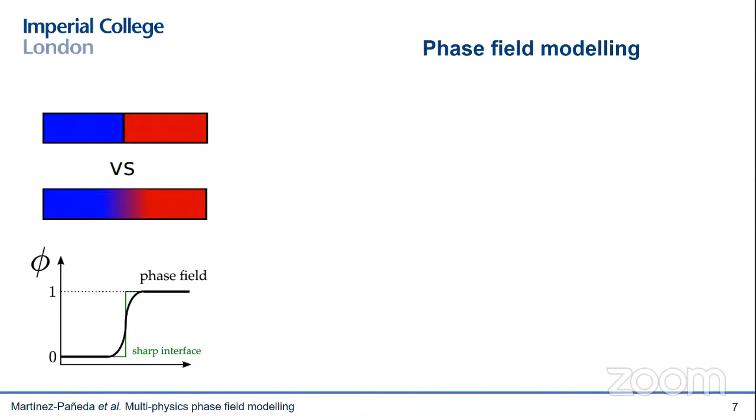So this could be cracks propagating, this could be grain boundaries evolving - whatever interfacial problem that you have, this very simple computational idea is quite powerful, and it allows you to track interfaces easily. There's three key advantages that I always like to emphasize.

The first one is that the interface equation is defined in the entire domain, so there's no need for any special treatment. The second one is that topological changes such as merging or divisions of interfaces can be naturally captured without any ad hoc criteria. And the final one is that it's very well suited for multi-physics problems, because you can easily couple that interface equation with equations describing other physical phenomena.

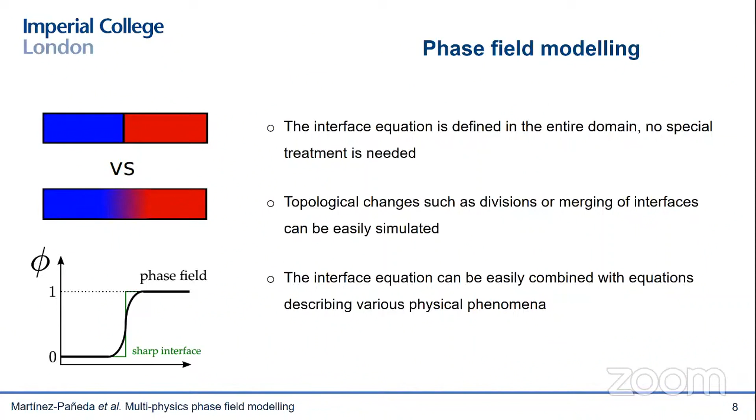So this is something that we're going to use quite significantly. In fact, phase field modeling has revolutionized many areas of science and engineering. Everything started in the condensed matter physics community and is now by far the most popular tool to simulate microstructural evolution and solidification. It has also very quickly become popular in the fracture mechanics community - I think I read that roughly a third of fracture mechanics papers these days are using this methodology.

And we have also very recently shown that it could also be used to describe the evolution of the corrosion front. These are all simulations, by the way. You can see very complex interfacial phenomena can be captured. If you look at the fracture problem, you can see that you get crack branching, coalescence of multiple cracks, initiations of cracks from secondary sites.

Or here you can see in corrosion how you can predict material dissolution, the evolution of the corrosion front, across secondary particles, and so on and so forth. So it could potentially be a very compelling tool, and I was going to use this for many of the problems that I'll be discussing later on.

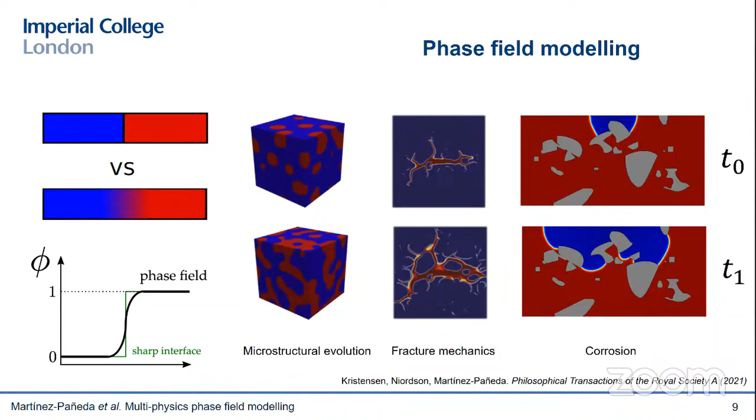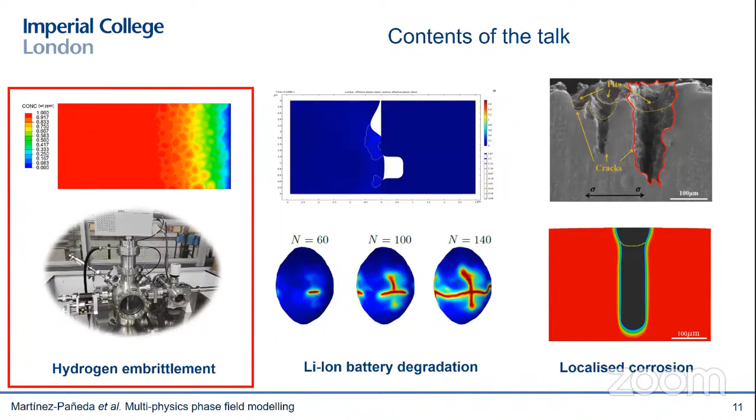So let me go back to the content of my talk. Just to motivate this, I think a big part of the motivation to work on hydrogen these days comes from the energy transition. We know that hydrogen is typically called the Swiss knife for decarbonization, and we know that it's going to play a key role in this energy transition. This is because hydrogen has the potential to decarbonize many applications and sectors, including some that are going to be particularly difficult to decarbonize, such as steel making or aviation.

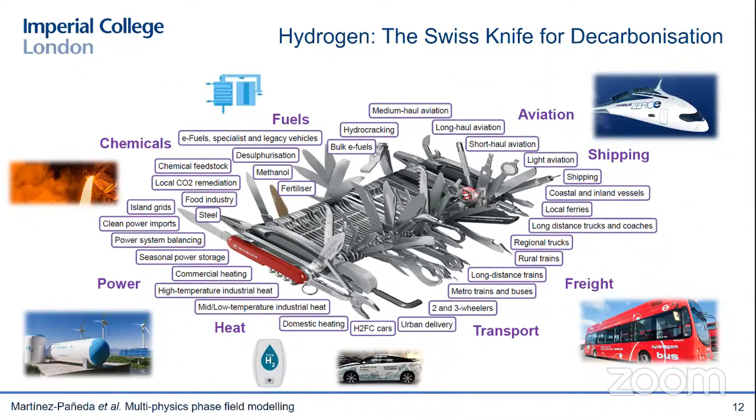But the problem with hydrogen is that it has a dark side. We know since almost 150 years ago that hydrogen makes metals very brittle. You can see here, this was a paper by Johnson in the Proceedings of the Royal Society back in 1875, where he speaks about some remarkable and extraordinary decrease in toughness and breaking strain in iron and steel in the presence of hydrogen.

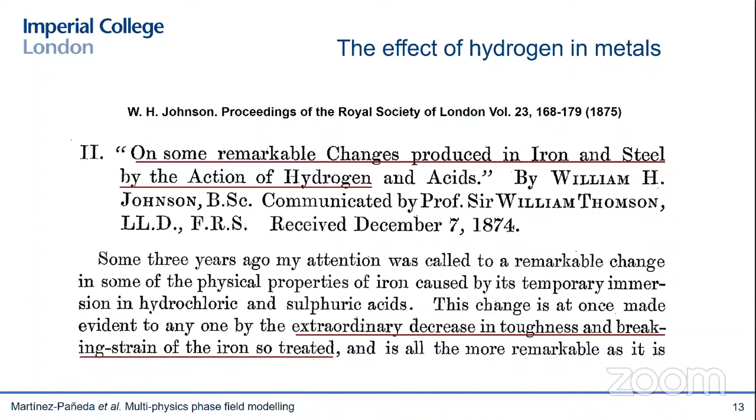In those days, it was very rare to see words such as remarkable or extraordinary in scientific papers. But the way hydrogen interacts with metals is indeed remarkable and extraordinary.

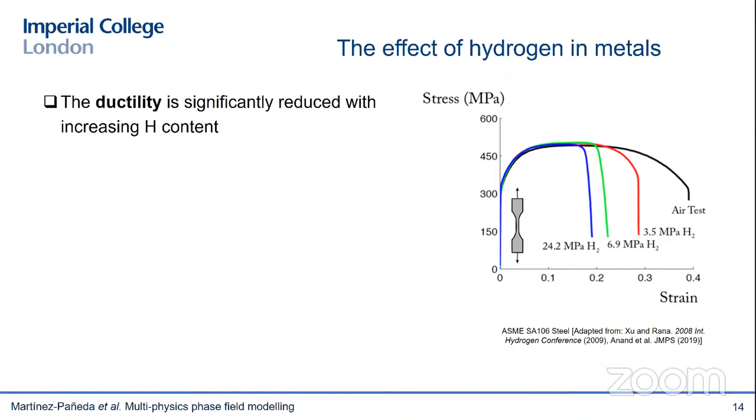One of the things we observed is a very significant reduction in ductility with increasing hydrogen content. You can see this here in these uniaxial stress strain curves. If I introduce hydrogen into my samples, I get a very significant reduction in the failure strain.

Another thing we observed is a reduction in fracture toughness. You can see here that we go from a fracture toughness of 150 megapascal square root meter to well below 40 megapascal square root meter if I introduce hydrogen into my samples, for example, by exposing them to hydrogen gas.

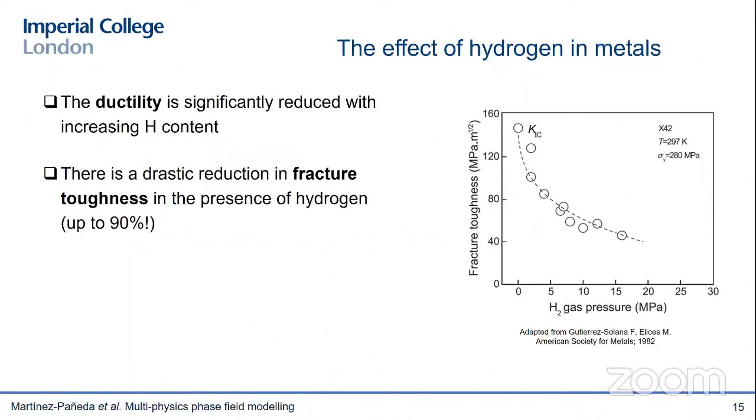All the results I've shown so far are for mid-strength steels. But in high-strength steels, this susceptibility to hydrogen damage increases dramatically. You can get fracture resistance reductions of orders of magnitude in these high-strength steels.

This is a key point to emphasize: the susceptibility to hydrogen damage increases with the material strength. You can see here fracture toughness versus yield strength, and these very high strength steels have a fracture toughness in the presence of hydrogen that is below 10 megapascals root meter, so almost as brittle as a ceramic.

This is quite important because it's basically telling us two things. First, hydrogen is compromising decades of metallurgical research. We have developed high performance materials, but we cannot use them. Second, by using these modern high-strength steels, we're very significantly widening the range of environments where hydrogen is problematic. Very little hydrogen content is sufficient to trigger hydrogen embrittlement failures in many applications and sectors where we never heard about this problem before.

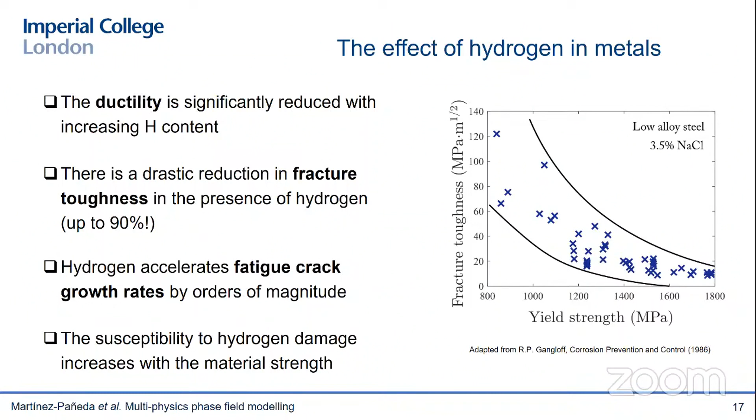Hydrogen embrittlement has traditionally been a problem related to offshore structures, where we have very aggressive environments. But now we want to use these modern high-strength steels because they're very cost-effective. So we want to use them in our cars, in our buildings, in our bridges, in our railways. And this is triggering numerous hydrogen-assisted failure problems.

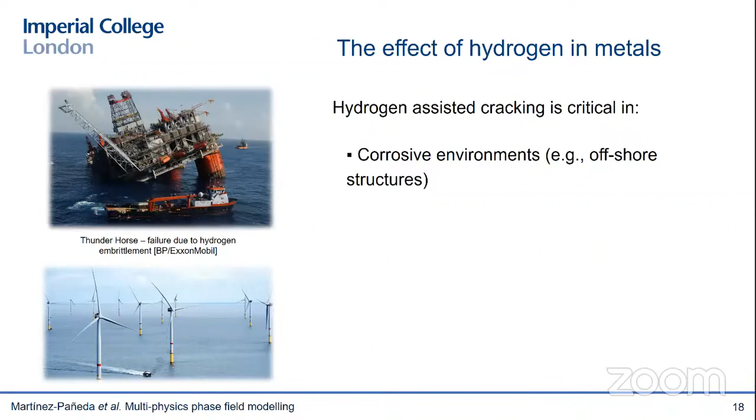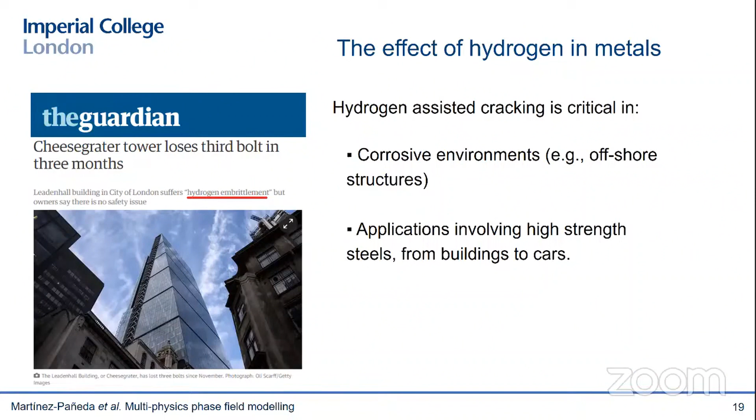You can see here, in otherwise very benign environments - this is a newspaper article from The Guardian, one of the main newspapers in the UK. You can see that just the hydrogen coming from the humidity is enough to trigger hydrogen embrittlement problems in one of the most famous skyscrapers in London.

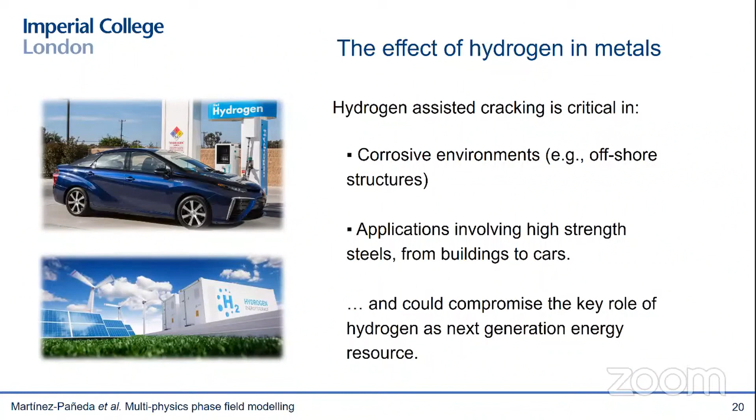And of course, this brings me back to my first motivation. If hydrogen can change by orders of magnitude the fracture toughness and crack growth rates in metals, how are we going to deploy this hydrogen energy infrastructure that we need to achieve net zero?

Well, I guess the thing is that there's no way back. Politicians have already made a decision. I don't know if it's the case in Brazil, but in Europe, there's a big push now to establish green hydrogen as an alternative source of energy. You can see some newspaper articles here. So there's a lot of money going in that direction.

And again, an impression that things need to happen very fast. There's a sense of urgency. You can see here, National Grid in the UK is hoping to have 4,700 miles of hydrogen transport pipelines in just 2 years. And that's going to be very challenging.

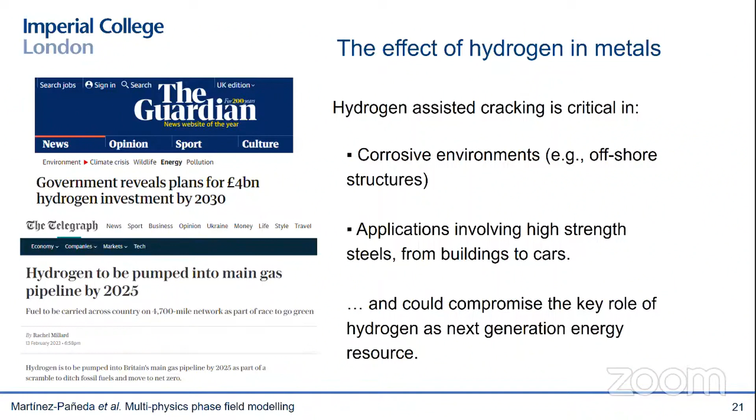In fact, we're already starting to see accidents, and the technology is not even there yet. This is in Norway. Very few countries have already started to establish the hydrogen technology, and we're already starting to see accidents there. And of course, what is missing here is a model.

It would be fantastic to have a model that would allow us to predict these hydrogen-assisted failures, because such a model will be a game changer. It will allow us to map safe regimes of operation. It will allow us to safely deploy a hydrogen energy infrastructure, and it will allow us to prevent those catastrophic failures.

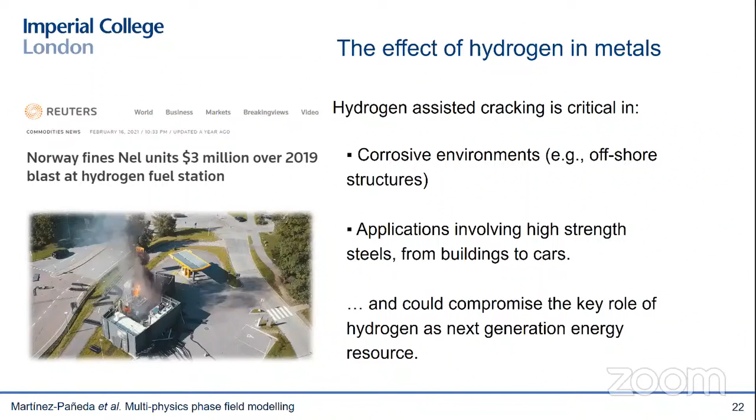But developing a model for hydrogen-assisted cracking is quite a long-standing scientific challenge. I think there are two main reasons why we don't have a model for predicting these hydrogen failures. One is that the problem is quite complicated and it crosses multiple boundaries. So we do know a little bit of the physics, but not the whole picture. We know that hydrogen atoms coming from gas, electrolyte, or water vapor environments will enter the metal.

They will migrate relatively fast through the crystal lattice, and they will accumulate in areas of high hydrostatic stress or high volumetric strains, where there's more space for the hydrogen to accumulate. But then hydrogen in this fracture process zone interacts with the metal at multiple scales and in many ways, by changing the dislocation mobility, the bonding strength. So the physical picture is not clear yet.

The second aspect to consider is that developing a model for predicting hydrogen-assisted failures will require expertise across multiple disciplines: chemistry, condensed matter physics, mechanics, material science. So it's quite a complicated problem. So I tried to adopt a multidisciplinary approach and develop a computational framework that would allow me to predict these hydrogen-assisted failures.

And to me, the key to prediction is that you need to be mechanistic. You need to be able to resolve the physical processes that are governing all the stages involved in hydrogen embrittlement, from the uptake of hydrogen, the ingress of hydrogen into the metal, to the transport of hydrogen through the crystal lattice, to the embrittlement process itself. So the accumulation of hydrogen in critical interfaces and the nucleation and growth of cracks as a result of that.

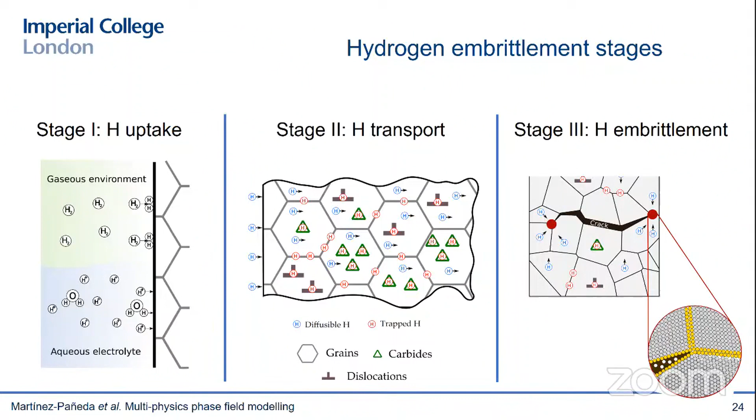So let me tell you a little bit of how I came up with this model. I think you probably get a clue at this stage that this is quite a beautiful problem because it is fundamentally very challenging. Many things are happening in there. It's very multidisciplinary, and at the same time, as I motivated before, it has very strong implications for engineering practice. So it's a very rewarding problem to work on as a scientist and engineer.

So let me explain to you what we did. The first thing is dealing with the hydrogen uptake. There we had to propose new models that were able to capture and quantify the absorption of hydrogen into the metal as a function of the environment.

There's two typical scenarios: gaseous systems and aqueous electrolyte systems. The gaseous systems are easier, and under certain conditions, you can find an expression that relates the hydrogen pressure or fugacity to the hydrogen concentration at the metal surface.

The aqueous electrolyte system is much more complicated because you need to resolve all the surface reactions happening at the surface of the metal, and you also need to solve the electrochemistry of the electrolyte, which can be very different inside of a pit or a crack relative to the bulk.

But we do know the physics, the equations that govern the hydrogen evolution reaction and the electrochemistry of electrolytes, so we can formulate a theory, and then we can implement that theory into a finite element code.

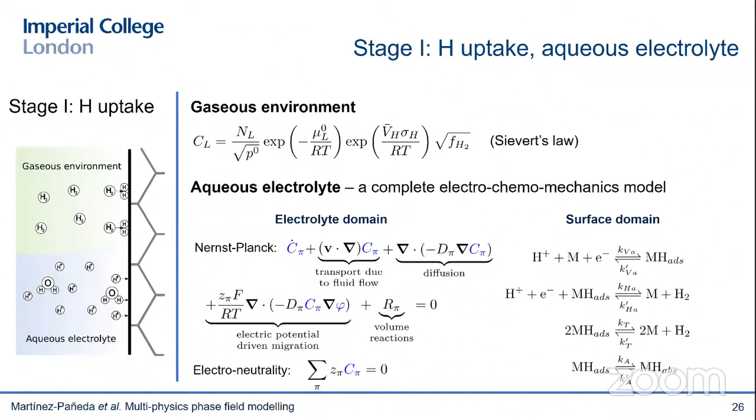So this means that the kind of theory we can come up with involves solving the Nernst-Planck equations for as many ionic species as needed in the electrolyte domain, and then solving the Volmer-Heyrovsky-Tafel and absorption reactions at the surface of the metal. These are the surface reactions. I'm not going to get into details, but the key point is that the model is physically based, in that it doesn't require any prior assumptions.

On the environment. You just rely on reaction rates that depend on the material and that you can measure in the lab. You can see that the pH and the overpotential come into play here. So the model is fully predictive in that sense.

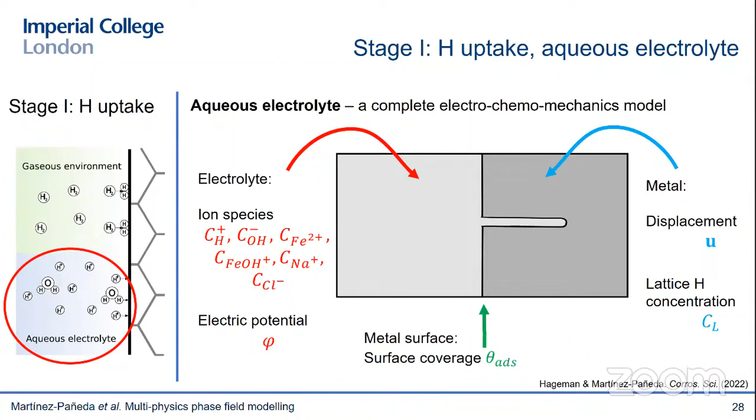At the end, you end up solving for all of these degrees of freedom in your finite element model: as many ionic species as needed in the electrolyte, the surface coverage at the interface, and then in the metal domain, the displacement and the lattice hydrogen concentration, among other things. So you end up easily with, I don't know, 10, 15 degrees of freedom per node. Of course, solving this 10 years ago was unthinkable, but computers have come a long way since then, and we have also developed in my group new computational procedures that can significantly accelerate these calculations.

Once you know how much hydrogen is coming into the metal, you can predict the transport of hydrogen within the metal itself, to predict the distribution of hydrogen within your structural component. One simple way of doing that is using an extended version of Fick's law, whereby hydrogen is driven by gradients of concentration and also gradients of hydrostatic stress. This coupling with the mechanics is quite important, because if you take the steady state solution of this equation, you end up with a hydrostatic stress term inside an exponential. So whenever you have a stress concentrator like a crack, your concentration of hydrogen is going to be much, much higher. This is a key element you don't want to miss in your model.

Another important aspect is that hydrogen not only travels freely through the crystal lattice, it's also trapped at microstructural features like grain boundaries, carbides, or dislocations. Those microstructural defects will sequester the hydrogen away from the crystal lattice. So we have developed more sophisticated models based on Oriani or McNabb-Foster, where we can account for this distribution of hydrogen within the microstructure, and predict where exactly the hydrogen lies.

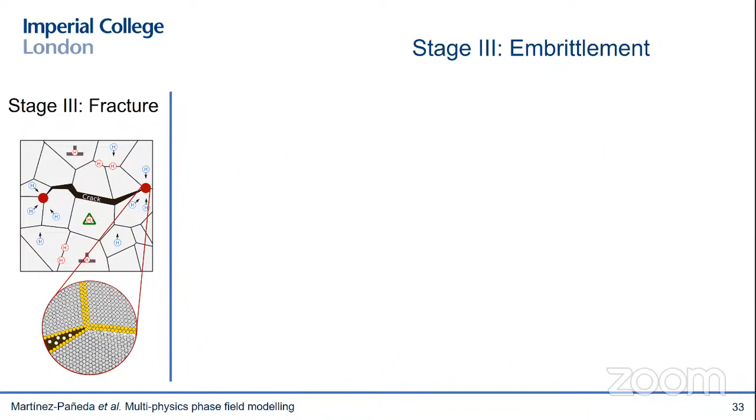The good thing is that phase field, in the context of fracture mechanics, provides a computational platform for Griffith's energy balance. Those of you who have studied fracture mechanics will remember that Griffith, the father of the field, postulated that a crack will grow whenever the energy stored in the solid was sufficiently large to overcome the energy required to create new surfaces.

So you express this balance of energy in a variational form. If you're able to minimize this functional, you can predict the evolution of cracks just as an interplay between the fracture energy and the stored energy in the solid. However, the challenge is that you don't really know where your crack surface lies, so it's a bit complicated to solve this computation.

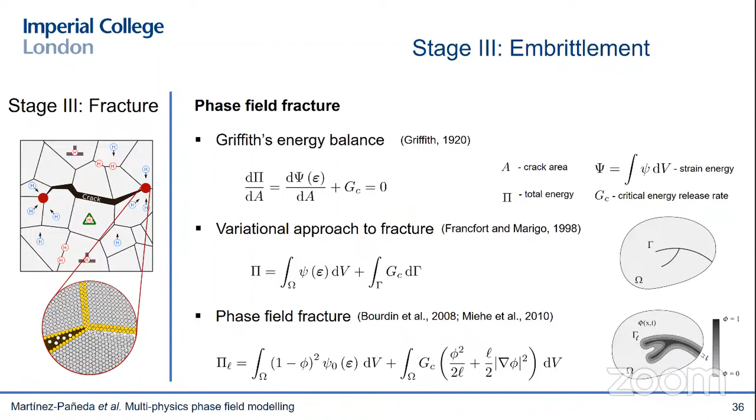You can get a good overview by looking here at the balance of the strain energy density and the fracture energy, the material property that measures the resistance of the material to fracture. Just by solving this additional differential equation, you can capture very complicated cracking phenomena on the original finite element mesh, without any convergence problems.

So all the results are based on Bourdin et al..

We've had a lot of fun in the past five years working in this area. We've tried to contribute to the community, proposing new monolithic solution schemes, new formulations for functionally graded materials, shape memory alloys, and other materials. But of course, we haven't been the only ones working here. This has been really a revolution in fracture mechanics, and some people in this room, like Fernando, have actually contributed to this area much before I did, with new formulations for fracture in elastoplastic solids, and also for

dilute species. So basically, I thought if I can extend the success of phase field to hydrogen embrittlement, that would allow me to capture this completely coupled field problem, where you solve the deformation, then the transport of hydrogen, and the key coupling between these is the coupling between the hydrogen and the damage.

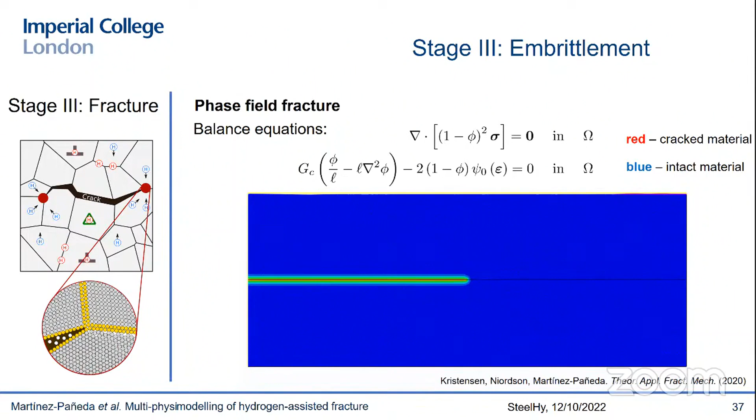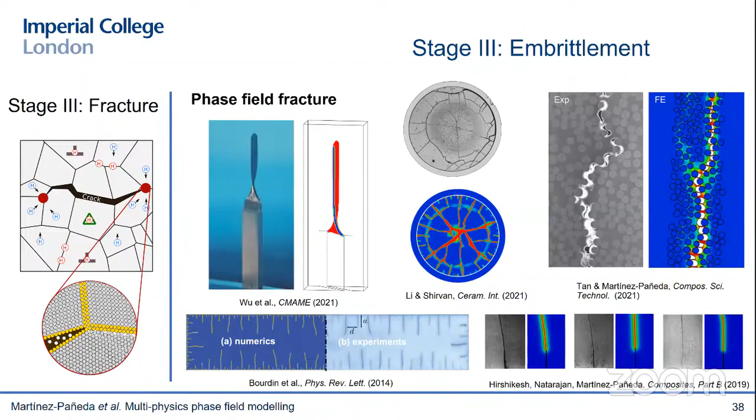The good news is that you can define this degradation function based on experiments. You can do experiments in multiple hydrogen concentrations and measure fracture toughness, and some of our industrial partners are doing that. Or you can also come up with any mechanistic degradation law that you're thinking of. In fact, some other groups have taken on our framework and extended it in other directions, making this degradation function depend on other micromechanical or macromechanical factors.

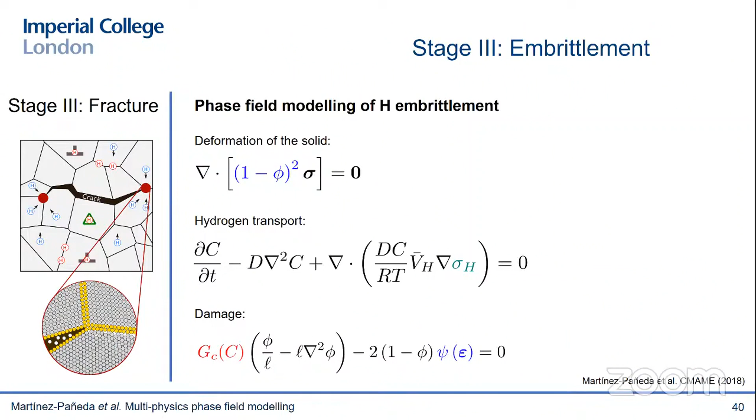But let me tell you a little bit of how I came up with what I think is the right hydrogen degradation function. The key question you need to answer is: how does hydrogen make metals brittle? How can it be that in the absence of hydrogen, a metal fails in a very ductile manner, through micro-void coalescence mechanisms, but the moment you bring hydrogen into the picture, it fails in a very brittle fashion, with cracks originating along the grain boundaries, as you can see there?

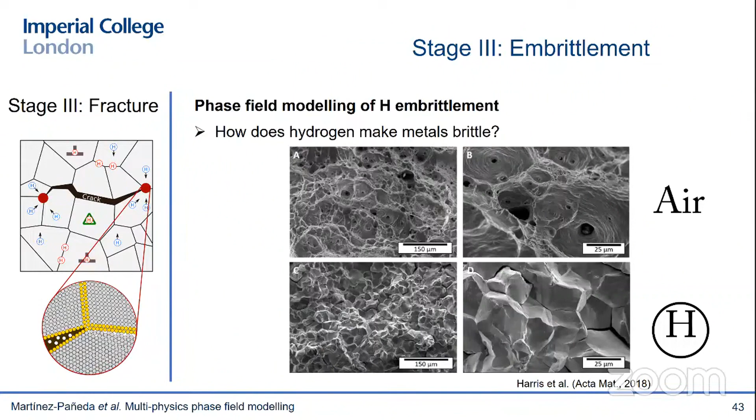We can use Oriani's equilibrium and we can measure binding energies in our lab. There we can plot the trap occupancy as a function of the hydrogen concentration in the lattice and the trap binding energy, a parameter we can measure in the lab. We know from our lab experiments that grain boundaries are quite strong traps, with a binding energy of minus 40 kilojoules per mole.

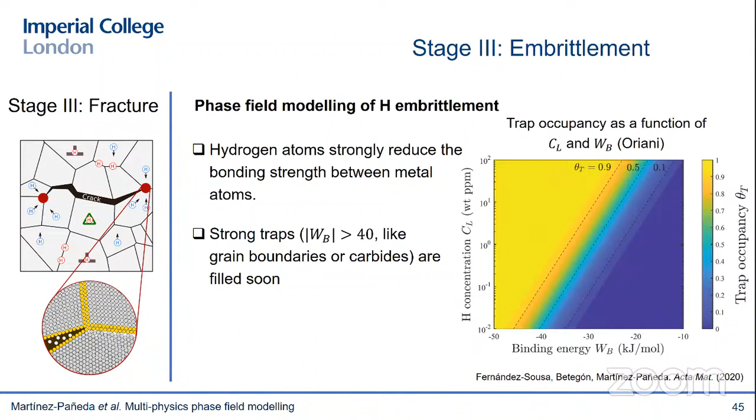So if I go here, I can see that my trap is effectively full if I have as little as 1 part per million of hydrogen. In other words, it is very energetically favorable for the hydrogen to accumulate in grain boundaries, and I know from the atomistics that this is going to make my grain boundaries much weaker. Then the next question is: is a 30 to 40% reduction in fracture energy or grain boundary strength sufficient to trigger a shift in failure mode from ductile to brittle?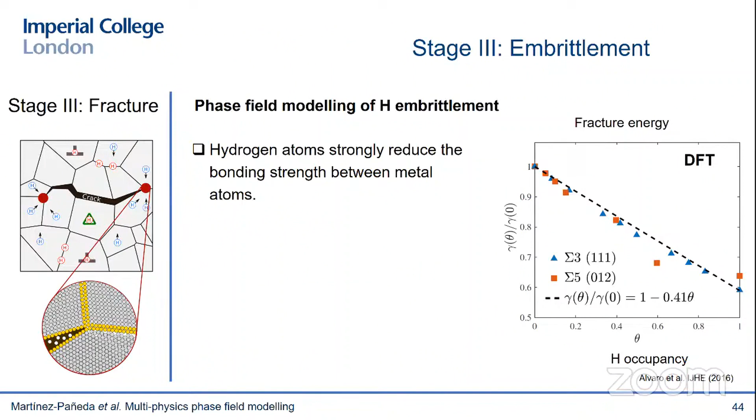In my opinion, the answer comes if you resolve the critical stresses of the problem over the critical distance. For that, I won't get into details, but we use strain gradient plasticity theories, because we know from experiments that the critical distance is a few microns ahead of the crack tip. So you need to resolve the dislocation hardening mechanisms that govern crack tip behavior.

But the key thing is that if you resolve the stresses ahead of the crack tip over the critical distance, you see that in the absence of hydrogen, your stresses are not high enough to reach that cleavage strength or grain boundary strength. But the moment you bring hydrogen into the picture, you get this 30 to 40% reduction in cleavage strength or grain boundary strength.

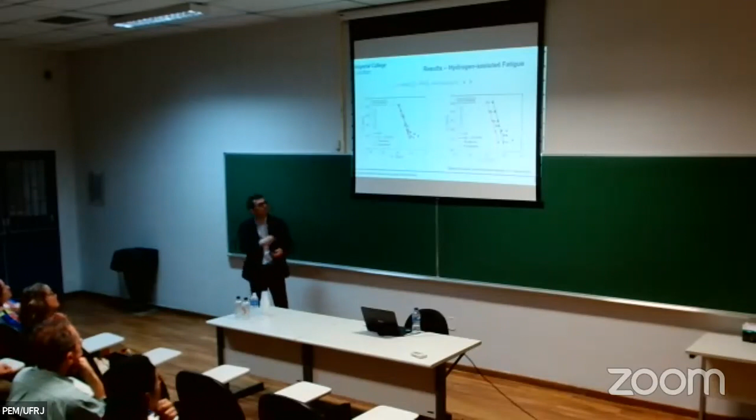And we can also predict as an output of the model Paris law behavior, so we can predict the influence of hydrogen on the Paris law coefficients, and deliver virtual SN curves for any arbitrary choice of example, as you see here, and environment, as you see here, for any given sample.

And these are cycle by cycle calculations, which are computationally heavy, but at the same time very powerful because they allow us to predict fatigue damage for any arbitrary load.

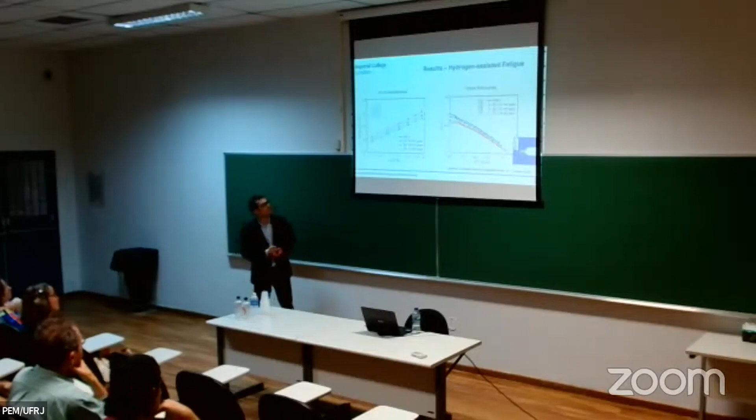Okay, so that takes me to the second part of my talk, lithium-ion battery degradation. The first one was the longest one, so don't worry too much. Regarding batteries, this one needs no motivation, I think. All of you probably now have with yourselves a device like a phone or a laptop that contains a lithium-ion battery.

So I guess the key question for us is that we want our batteries to last longer. We don't want to change them more than every 2 years. We want the battery of our laptop to last for transatlantic flights. We want our electric cars to be able to go over hundreds of miles and so on and so forth. So there's a need to improve the durability and the performance of lithium-ion batteries.

I suspect most of you know how lithium-ion batteries work. Essentially, every time you charge the battery, you have lithium ions that go from these particles in the cathode to these particles in the anode. And every time you discharge the battery, the lithium ions do the opposite, going from the anode particles to the cathode particles.

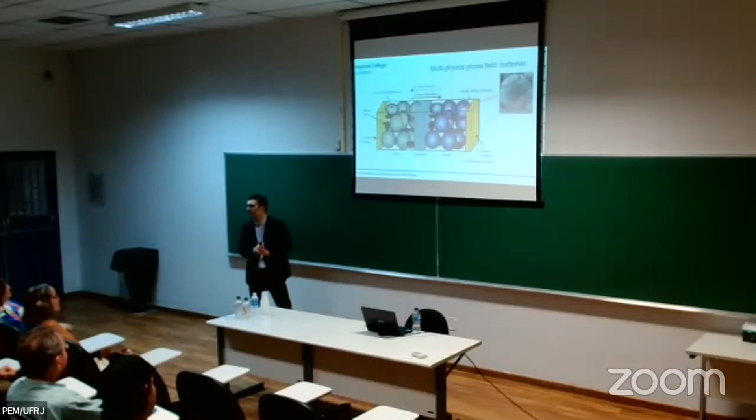That lithiation of those particles, that exchange of lithium ions inside the particles, causes some deformation within them. And that continuous cycling, the swelling and shrinking of those particles, causes the accumulation of cracks. This is arguably the main degradation mechanism for lithium-ion batteries. The reason why your phone needs to be charged every night is those cracks appearing in the electrode particles as a result of charge and discharge, this swelling and shrinking of the particles.

So we try to use those models that I presented before, these kind of multi-physics based fracture models, to predict under what conditions we will see those cracks, and to try to map safe regimes of operation of those lithium-ion batteries. You can see here.

The idea is quite simple and quite similar to the previous model. The equations are almost the same. You can see that we again have a three-field problem. In this case, we're modeling lithium diffusion instead of hydrogen. There are two main differences. The first is that the lithium diffusivity changes a lot, in fact. The second is that we have these chemical strains that also exist in hydrogen, but they are very small, so we normally neglect them. But these are particularly significant in lithium, because the partial molar volume is quite high.

And in fact, these chemical strains caused by the difference in concentration of lithium, the swelling and shrinking of the particles, is in fact what leads to the cracking process. We don't have any other mechanical load, it's just the lithiation process.

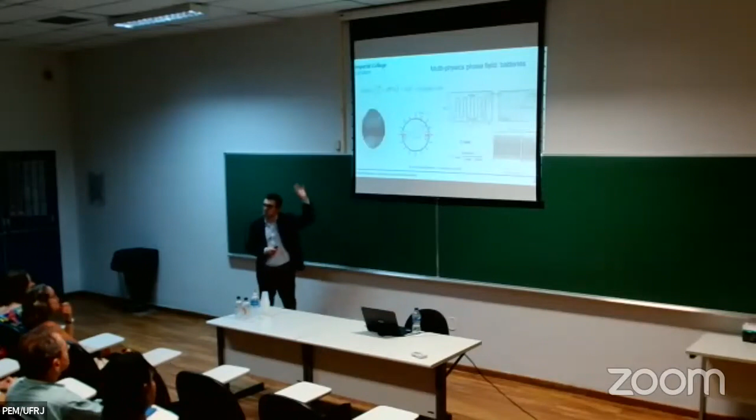Some people have used phase field models to simulate the failure of electrode particles, but they did that only over half a cycle. But of course, this is a cyclic process. So what we did is add this fatigue degradation function and simulate the failure of these particles over hundreds of cycles, not only looking at idealized particles, but also at realistic particles.

We conducted cyclic loading over hundreds of cycles, and effectively you can see some representative results here, the propagation of cracks in both idealized and realistic particles.

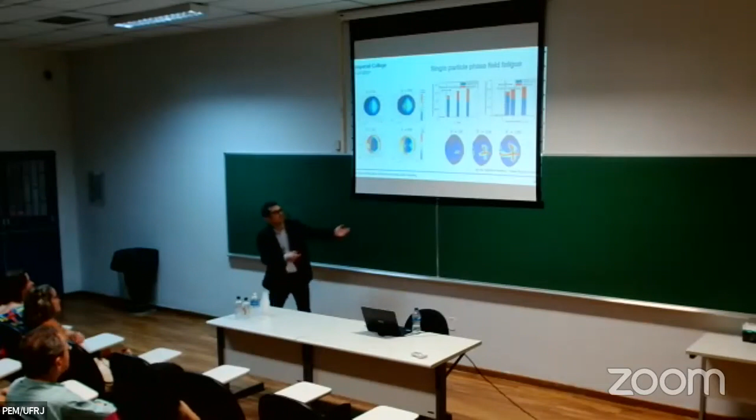And then we can use this virtual platform to map safe regimes of operation. We can, for example, change the charging rate, the C-rate, and determine the threshold below which we will not see cracking appearing in those particles. We can also change, for example, the particle radius and determine what is the smallest or largest particle that will give you cracking problems for those loading conditions. So this is quite useful in terms of mapping safe regimes of operation and determining the right use of those batteries.

But we've also taken this one step forward. This is together with colleagues at UCL. They have very advanced imaging facilities there, so they're able to characterize the full electrode, not looking anymore at one particle, but at the full electrode.

This allows us to look at the secondary phases, not only at the particles, but also at the binder, at the separator, and also at the heterogeneity of the problem. For example, you have a functionally graded electrode with particles of different size. We can play with the thickness of the electrode, so you take it one scale further. And computers today are, I think, sufficient to the task.

So again, we couple this with the imaging facility, so we can do X-ray scans of those electrodes. Then we do the segmentation, so we can determine the different phases, the pore, the carbon binder, the particle, and then we do our finite element analysis. We do this in 3D, encompassing dozens of particles.

These are some representative results. We can see the distribution of lithium, the distribution of cracks, where cracks are appearing, and we see a very heterogeneous electrochemical response. We can see that first, the thickness of the electrode plays a big role, but we may also want to look for solutions that do not involve a homogeneous distribution of particles, since you can get very different responses within the electrode.

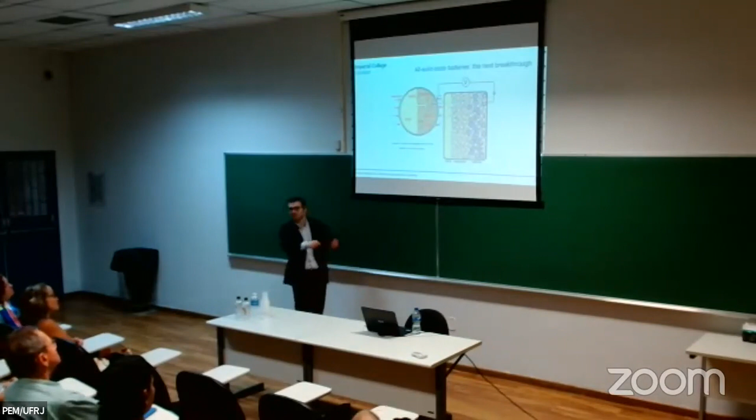The idea would be to improve safety by having a solid electrolyte instead of a liquid one. You can also increase capacity by an order of magnitude, because then you can use lithium metal as an anode, which becomes stable with solid electrolytes, unlike with liquid electrolytes. So you increase capacity by an order of magnitude and remove all the safety concerns related to batteries. It's really the next big breakthrough in battery technology.

There's a lot of effort going into commercializing these solid-state batteries. But the biggest problem, the reason we don't have commercial solid-state batteries yet, is that we have mechanical instabilities happening at the interface between the lithium metal and the electrolyte. You can see cracks, wetting, and the biggest problem is these dendrites—needle-like structures of lithium that start growing at the interface between the anode and electrolyte, and grow all the way into the cathode, causing the short circuit of the battery.

So we need to be able to understand these mechanics problems in order to achieve this big breakthrough in battery technology. Let me tell you a little bit about how we did that.

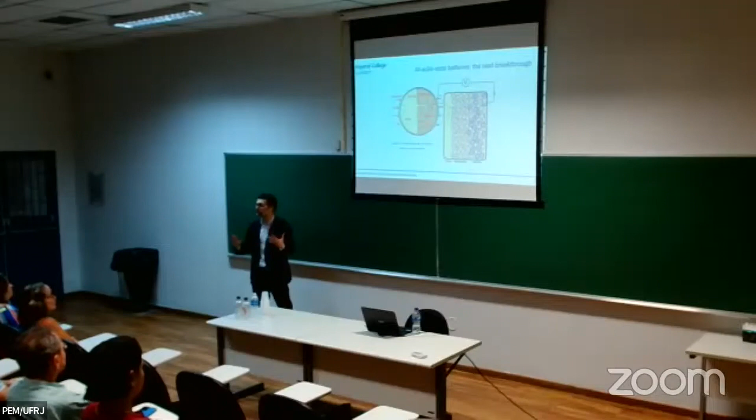The community is basically divided into two lines of thought. Some people are trying to figure out what they can do to prevent dendrites from growing, for example putting very stiff ceramics as electrolytes and hoping it will arrest those cracks and dendrites. The other part of the community, which is now growing, thinks it's impossible to stop dendrites from growing. So if we can understand under which conditions dendrites form, we can also find a solution for this battery problem. I've been working on this for quite a while now.

This is what you typically see with solid-state batteries. These are some very nice SEM images from the group in Oxford. First, you start with a pristine, almost perfect anode-electrolyte interface, but every time you discharge the battery you remove lithium, creating these voids. Every time you charge the battery, you plate and deposit lithium, so those voids shrink, and sometimes they become occluded from the interface, separating themselves from it.

Being able to capture the evolution of these voids is critical, because at the edges of those voids you get what we call current hotspots—localized regions where the current is very high. Because the current is high, during plating that's where lithium deposits and dendrites form. So if we can eliminate these hotspots, we eliminate the dendrites. To eliminate the hotspots, we need to understand how they are generated in the voiding system, so we need to simulate how those voids grow and under which conditions.

This is quite an interesting multi-physics problem that again has a complex interface involved. In this case, the interface is not a crack but those voids in the lithium metal—this is what we try to simulate. Again, a suitable problem for a phase field multi-physics model.

This is what we try to do. We had to develop a model from scratch, and the ingredients we introduced in our model, which we thought were the most important ones: first, you need to capture those interface reactions. Every time you have plating or stripping, lithium atoms are either removed from the metal or deposited in the metal. We capture that through boundary conditions.

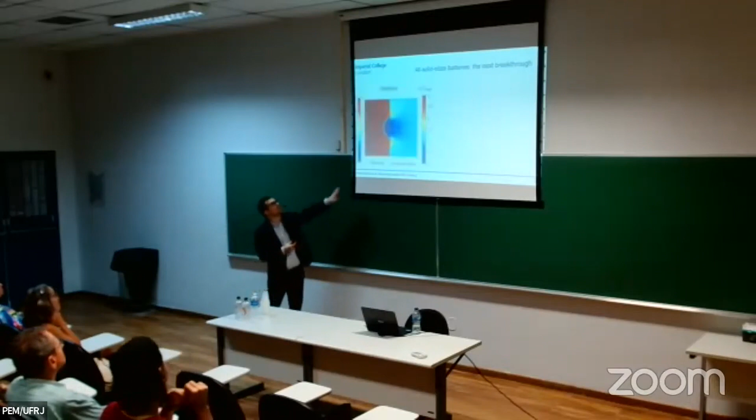These are the kind of results we get. This is for stripping - on the left you see a single void, this is the phase field, and this is the current. You can see we predict what we see in the experiments: the void is growing with a pattern similar to what we saw in those SEM images before. The model naturally captures how the current localizes at the edges of the void, so we can measure those current hotspots and determine when we reach a critical value.

This is what you see when you get plating. Again, you see how the void starts shrinking and eventually separates itself from the interface - exactly what we see qualitatively in the experiments. Again, we can see how those hotspots eventually disappear with the plating cycle, so we replicate the charts.

We can do this for much more technologically relevant conditions, with multiple charge and discharge cycles and multiple voids interacting with each other. We do this while applying pressure, so we're able to capture how those voids eventually shrink and at which pressure we make those voids disappear.

Effectively, the takeaway is that we have a virtual platform that allows us to map what are safe regimes of operation, and what regimes will enable a breakthrough in solid state battery technology. We can predict this voiding and hotspot phenomena as a function of the pressure, the material, the geometry of the cell, the mold, the material of the electrolyte and anode, and so on.

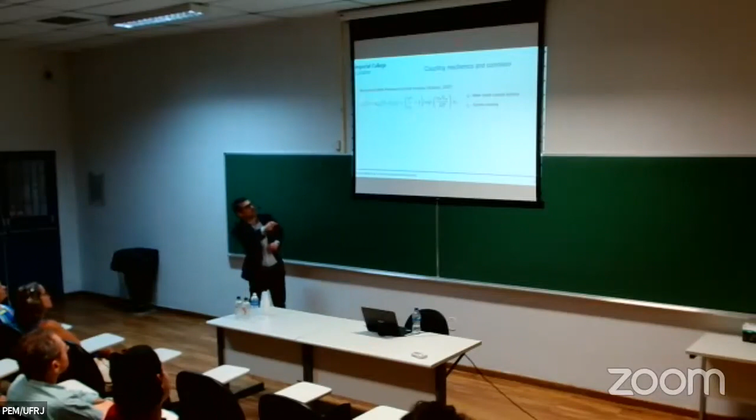We have also introduced two mechanical elements that I think are important. The first is the fact that mechanical fields enhance corrosion kinetics—this is the work by Gutman. This is the corrosion rate, and you can see it depends on the plastic strains and the hydrostatic stress. We can incorporate that into our model because we can make this phase field mobility coefficient relate quantitatively with the corrosion current density, and make it dependent on these mechanical fields.

We have validated this with a sealing test under different loading conditions, and you can see here the comparison with experiments—very good agreement in terms of the length of the corrosion region, but also the right morphology. These two images on the right are in the same scale. We chose to model only one pit, but we could have modeled more, and we get very good agreement in terms of the shape of the pit as well.

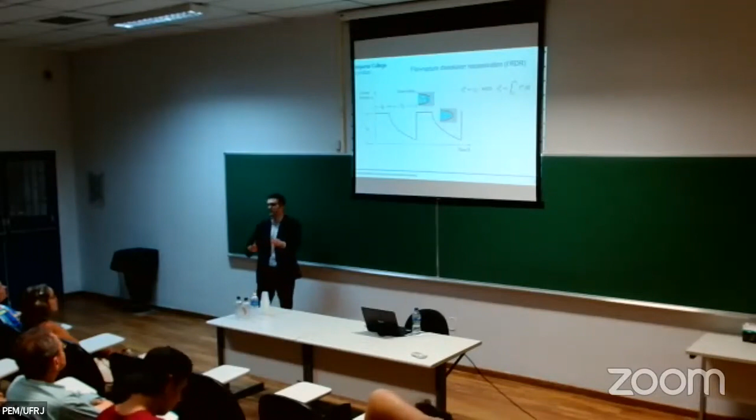You can see here this example of different environments—we have faster or slower repassivation, and we see the trends with respect to different experiments. Because we're dealing with phase field, we can deal with any complicated condition and multiple pits that eventually interact, and we can do this in 2D, in 3D, and so on and so forth.

I'm quite excited about the whole thing because this platform can very easily couple with other equations. It's true what my experimental friends in corrosion science say—lots of things happen in corrosion, it's a very complicated problem. But we understand those things thanks to that good experimental effort, so we can incorporate those equations into our model.

So we can capture the role of the electrochemistry, we can couple that with the hydrogen problems discussed before. Occasionally we have hydrogen uptake into the metal as a result of the corrosion process. We can also capture intergranular corrosion here.

You can see here the role of the microstructure. We know the microstructure plays a role from a mechanical point of view—you have this mechanical anisotropy—but we also know corrosion can be anisotropic, so corrosion rates are sensitive to crystallographic anisotropy. We can extend the model and define a grain orientation-dependent corrosion potential, and capture the effect of the microstructure. This example is a microstructure-sensitive calculation, but we can have any microstructure we wish and see its role in changing the corrosion process.

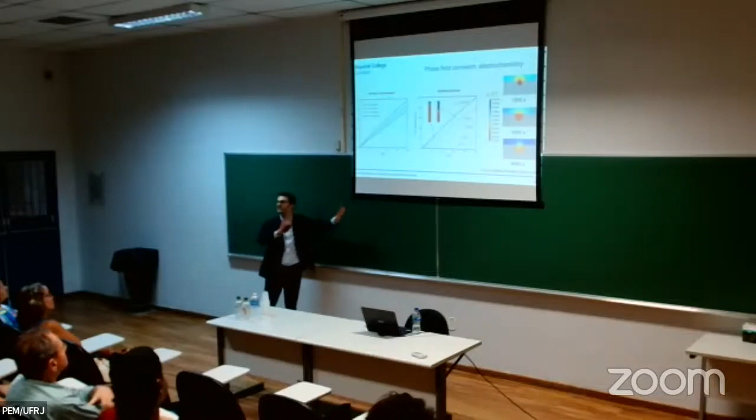Here we can solve for as many reactions and ionic species as we want, similar to what we did in the beginning with hydrogen, and we can capture the role of the solvent concentration, the pit potential, and so on. So as the pits and cracks propagate, you can capture how the environment naturally evolves as a result of this corrosion process. A lot of things are happening, but all of those things can be simulated with this framework, provided your computer is large enough.

And we have also very recently extended this to deal with biocorrosion. There's a lot of emphasis on using magnesium for implants, because magnesium is biodegradable, so it will naturally degrade into the body. Whenever a kid breaks a bone, you don't need to do a second surgery to remove the implant, you can just allow the magnesium to degrade.

The problem is that the magnesium is degrading too fast, so there's not enough time for the bone to heal. There's a lot of effort in the scientific community trying to alloy the magnesium or come up with composites, but they don't have a nice model to look at this. So this allows us to predict that kind of biocorrosion.

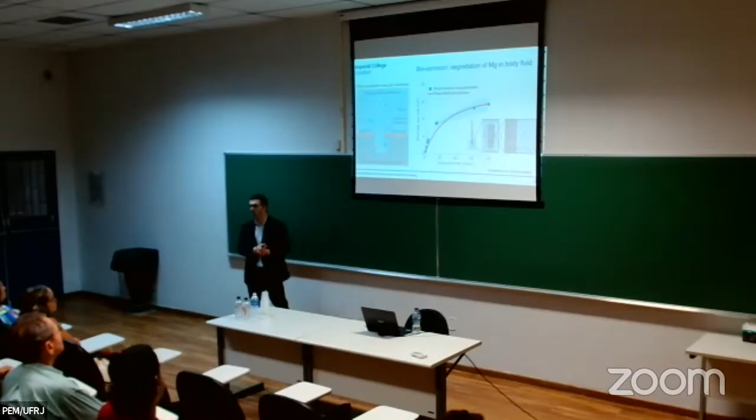This is very good because we can validate our model with in vitro conditions, things that people can test in the lab, and then we can go into in vivo conditions, which are different and have different environments, but those come naturally in the model. So yeah, thanks a lot for your patience.

I'll just finish with a few concluding remarks. First, I would say that to me, the discovery of phase field has been fantastic. I consider myself a computational fracture mechanics person, and I've tried absolutely every method out there: XFEM, physical modeling, remeshing. I went to conferences, saw people presenting nice videos, came home, reproduced the video, then changed something, and then nothing worked.

I did the same with phase field, but everything worked, everything was very robust, very smooth. So I really committed myself to their cause. I like to talk about it because it has been a game changer for me, not only in fracture mechanics, but any interfacial problem. We have shown it can be a revolution in corrosion, and I think it will be a revolution similar to what we're seeing in fracture.

We have also shown that it can be used, for example, to predict the evolution of voids in solid-state matter. I think this coupling of phase field with multi-physics problems is very powerful because it allows us to physically resolve the underlying physics of the problem. So we don't need to make any strong assumptions - we just say we know what physical mechanisms happen, we know the differential equations of the mechanisms, let's bring them all together.

At the same time, we're also able to deal with the large scale and complex conditions of engineering practice. I think we can make a difference in many areas relevant to the energy transition, like the failure of metals exposed to hydrogen. Our industrial partners are using the models I showed you to deploy hydrogen energy infrastructure, for example to design pressure vessels for hydrogen storage, or to determine under which conditions we can transport hydrogen in the gas pipeline network.